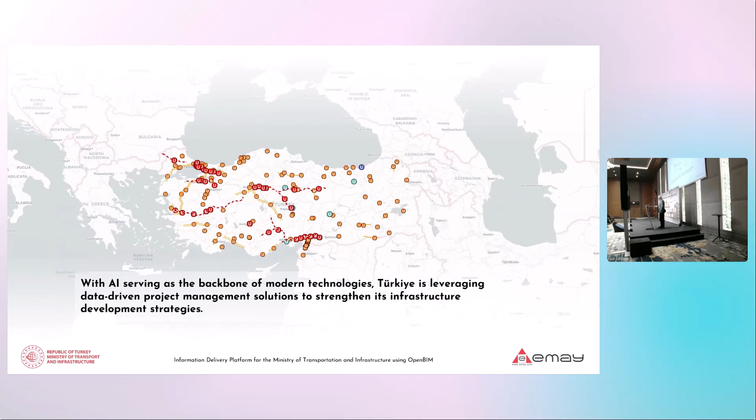As you know, in the AEC sector, the most significant transformation today is driven by data-centric processes. Turkey aims to manage its investments more efficiently and transparently through solutions based on AI, BIM, and data management. At the core of digitalization lies data with openBIM. This data is usable not only in design and construction, but also in operation and maintenance. This leads to greater transparency, efficiency, and sustainability.

Infrastructure projects also do not end with design and construction. They continue for decades through operation and maintenance. The critical point is transforming decisions into data and making them usable at every stage.

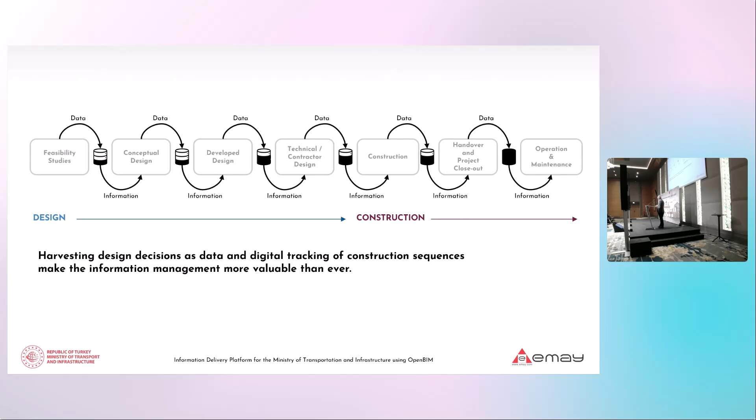I want to talk a little bit about Turkey's BIM journey, which can be summarized in 4 stages, 4 periods: 2013 to 16, initial ideas; then 16 to 19, metro project adoption; 2020 to 24, partially mandatory use in transport projects especially; and from today onward, openBIM integration.

Then in 2017, my company developed the first information management software for Istanbul Metropolitan Municipality to use in a railway project. Also in 2022, a GIS-powered nationwide information delivery management software, which we call UYS in Turkish, for infrastructure projects was initiated by the Ministry of Transportation and Infrastructure. Starting 2025, the journey will advance into its fourth period, marked by ongoing integration of openBIM strategies into the UYS framework and beyond.

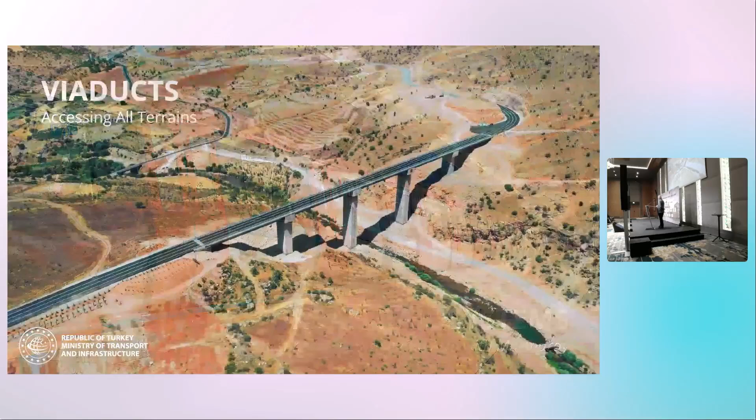This system spans 5 key sectors: roads, high-speed railways, bridges, airports, communication, urban rail systems, viaducts, and ports. And there are big projects.

The main idea is effectively 5 sectors managing more than 25 governmental institutions, and 70 consultant companies, more than 2,600 contracts, and let's say 2,000 investment projects under a single system. This is the main idea, and this forms a comprehensive user ecosystem that coordinates information flow at all levels.

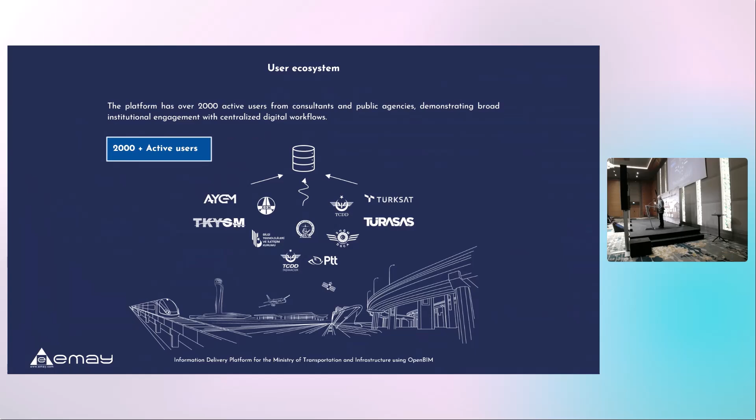I mentioned 25 institutions, so in the ministry, over 2,000 active users, including ministries, municipalities, engineering companies, and construction companies. UYS consists of modules by function: project management, investment management, strategic planning, data management, and user management.

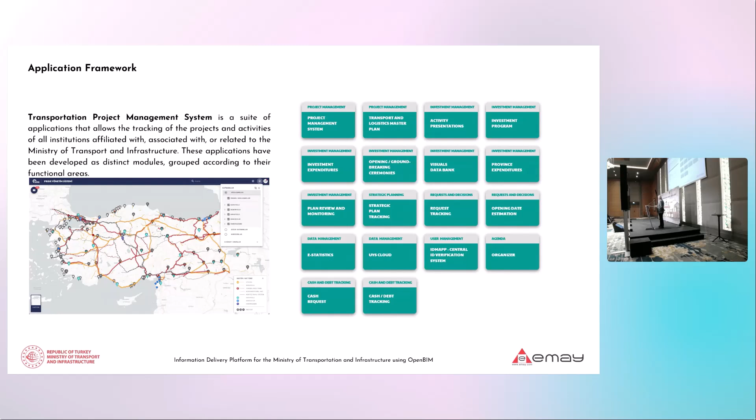A crucial component of the platform is its GIS integration. UYS is built upon a robust GIS infrastructure with geometric data stored in PostgreSQL databases. The PostGIS extension is essential for processing and exporting this data. Published data is imported to the GIS server using SQL codes, where the visualization process takes place before being published to the front end of UYS.

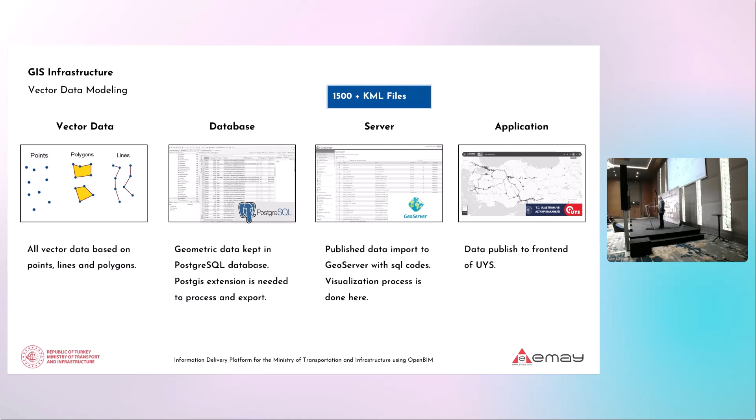All vector data is based on points, lines, and polygons, and the system contains over 1,500 KML files. This data is visually displayed on the UYS map screen. Our featured GIS interface allows for filtering all projects by province and vision projects from the national transport and logistics master plan by sector.

The most important part is also the legislative framework. Effective BIM implementation necessitates a robust legislative framework. The BIM technical specification ensures the integration of digital design and construction activities, setting standards for digital deliveries, transport management, and responsibility matrix. This BIM technical specification is published by the Ministry for institutions to use in all tenders.

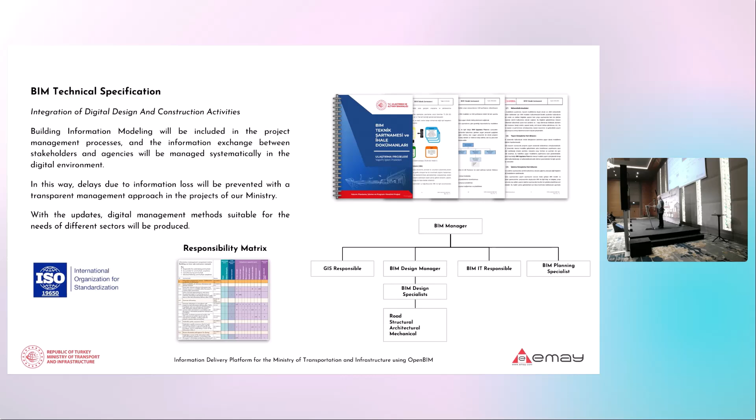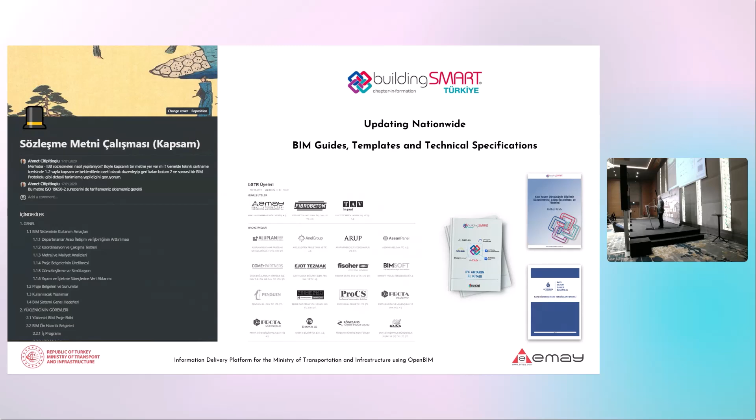The other legislative framework item, the construction program specification, mandates the generation of reports for key performance indicators, including product pace, cost, extension, and overrun. This helps identify bottlenecks in both cash and physical progress. It's also a mandate from the ministry, and continuously updated guides and templates ensure a common digital language.

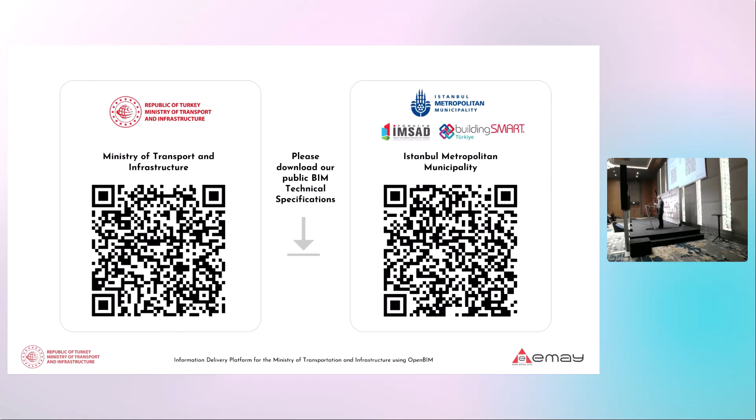Both specifications can be downloaded. The Ministry and Istanbul Metropolitan Municipality public BIM technical specifications are available for download by all, though I think those are in Turkish.

Another goal is our BIM model viewer interface, which introduces a new user interface within the project management module that we have to view IFC models and validation reports. This forms a key objective for this year in our journey to integrate openBIM strategies into the UYS framework nationwide.

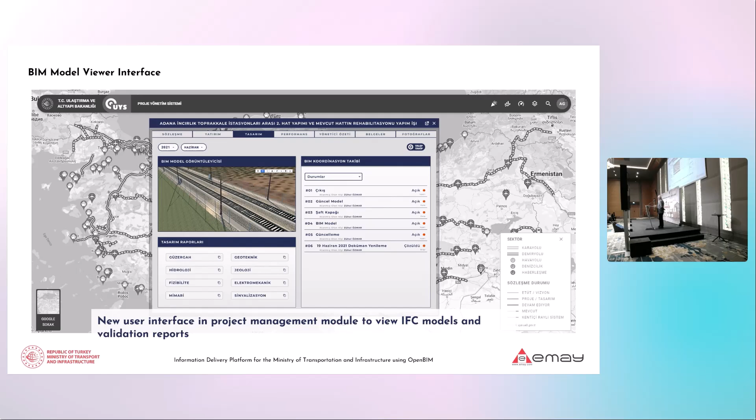Let me summarize all the presentation in two slides. Our achievement with UYS we can summarize in four items.

As you know, our achievement with UYS has been quite significant, with supervision over more than 3,000 contracts and more than 2,000 active users. We have made some steps in big data management, enabling real-time budget and progress tracking through transparent and efficient information use. We have built a geospatial data stock with over 1,500 KML files. This is the root of the whole project, and it has resulted in optimization and increased productivity.

Approximately 0.1% saving, roughly 10 million euros on an investment budget, when we think about the whole budget of 10 billion euros. This demonstrates our significant impact on financial oversight and resource optimization.

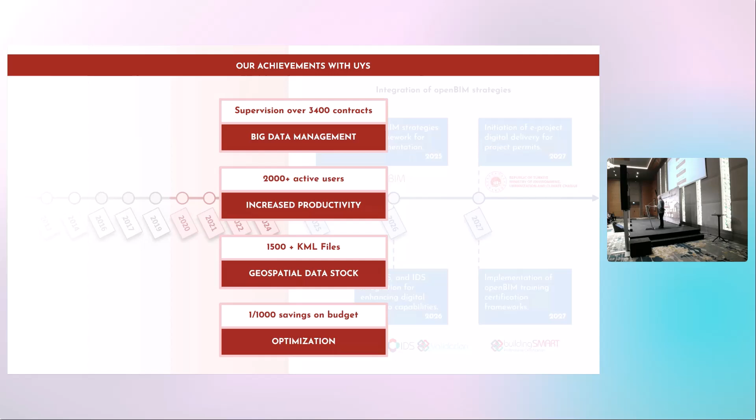Our future goals for openBIM integration: to follow international standards, aiming to comply with ISO 19650, and to create a foundation for a digital twin by automatically checking models and combining BIM and GIS. This will let us see 3D models in the GIS map. And to build a large collection of BIM data by delivering IFC models and creating IDS schemas, which will help us complete better both national and international data-driven projects.

And to improve our technical standards - it's not easy - under the guidance of buildingSMART Turkey, we are updating our BIM technical specifications to match the latest openBIM standards. We are also designing IDS schemas using the buildingSMART Data Dictionary. This is the most important part: improving the quality of our digital assets and making sure organizations can meet these new standards.

In conclusion, the UYS platform represents a pivotal moment in Turkey's approach to managing large-scale infrastructure projects. Our future objectives with openBIM integration are to align with international standards, enhance digital asset quality, and build a widespread information management culture across the sector. Thank you for your attention.

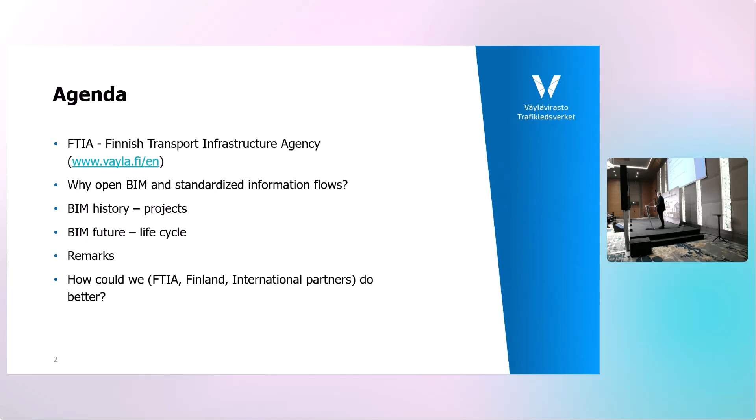First of all, a little bit about our agency. We are a state organization responsible for roads, railways and maritime routes in Finland. Finland is a country in Northern Europe, and we are a very client-oriented organization. We are only 480 people working, but in our projects and processes we are buying about 18,000 people working. So we are buying technically everything, we are just a client organization.

This is our organization, a very typical public organization. We have different divisions in information management, you could also say silos, and we are working on how the life cycle information could go through the silos. We have a planning department, which does conceptual planning of the road and rail network development. Then our project division's only purpose is to make projects as efficient, fast and cost-efficient as possible. And then there is an infrastructure management department, responsible for the routes and networks. For example, the road network is 78,000 kilometers compared to a big project which is maybe 5 to 10 kilometers. The information needs are quite different.

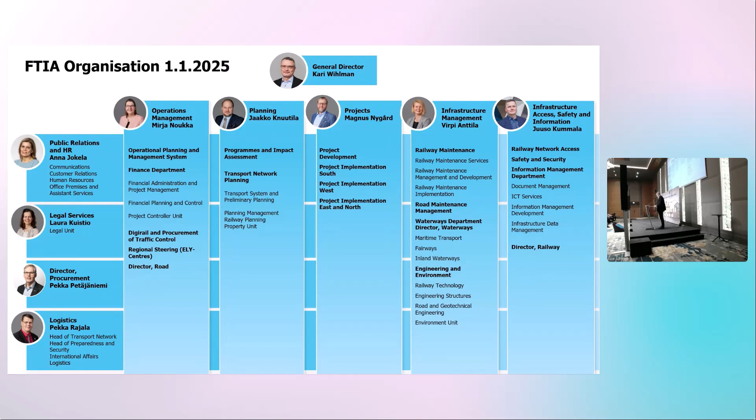But our goal is the digital twin. In the last session, Leo Svoboda was talking about digital twin - what is a digital twin, what's a digital model? We have defined in the FTIA that digital twin consists of the digital model, which is all infrastructure, technical infrastructure. And on top of that there is lots of information - traffic information, safety information, weather information - and that all is digital twin. So we don't talk about one bridge project.

Our organizational goal is that the digital twin and real-time asset information management is better by 2030 than it is now. So in the project information view, our project information coming from design to construction is linked to the asset information management system someday with the push of a button. Not yet - we also need real, reliable information from design to construction and so on. And this needs changes in our processes. We have traditionally had very siloed processes across all those departments.

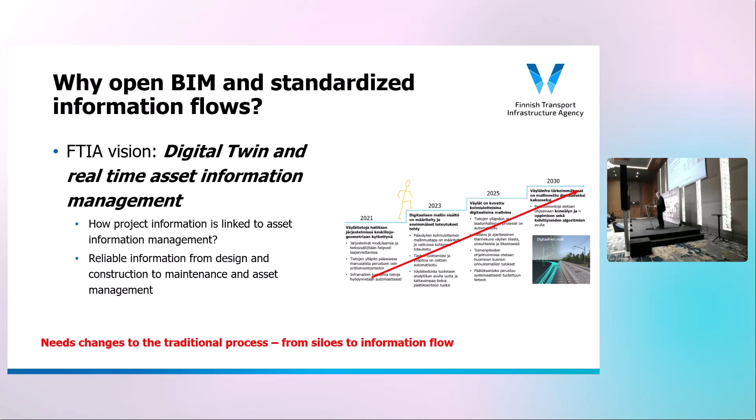Okay, very shortly, BIM development in Finland. I think in every country the building sector has started BIM development. It was already in 2012 that general BIM requirements came from the building sector, and infrastructure followed. Between 2010 and 2014 there was a big infrastructure BIM open development project where the general infra BIM requirements for our country were generated. We follow them in FTIA.

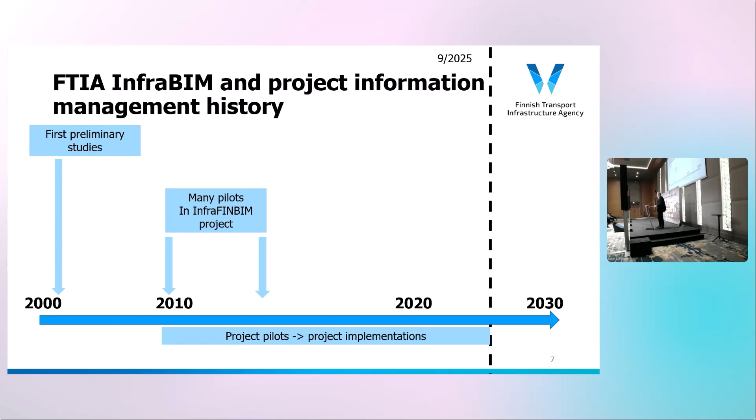We have made additions with our own things. So actually our infra BIM history in FTIA is already 25 years, so it's a long time - it's not changing in one night. We started first preliminary studies already in 2000, with the big national development project in 2010-2014. Since that project, we started to pilot BIM, and pilots have continued as a normal way of working in our project world. The first BIM guideline was the Bridge BIM guideline in 2014, the Road and Railway BIM guideline in 2017, and we have also been involved in bSI standardization work since around 2015. Tina maybe remembers better than me, since he was working at that time.

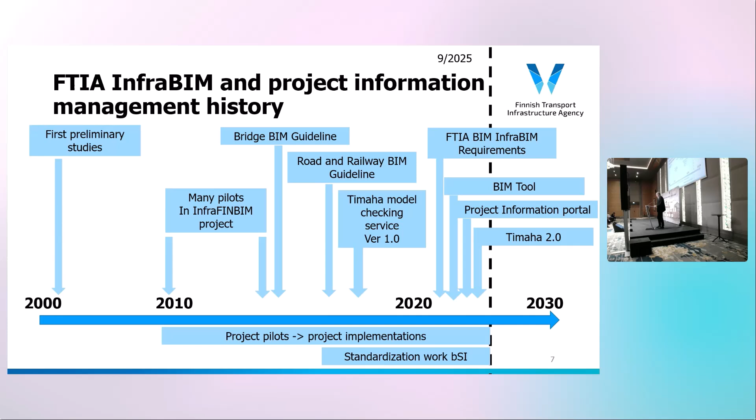The Timaha model checking service was helping our project managers handle BIM information requirements. We piloted that earlier, and after that we actually updated our FTIA BIM requirements in 2022. We have a tender BIM tool for our organization's use, and a tender project information portal for our organization's information use. And the last one is the new version of the Timaha information data qualifying service. This is very shortly our history.

And now we are working with our infra BIM requirements. There's a book or guideline for the roads and railways, and a book or guideline for the bridges, and they are over there - unfortunately, they are only in Finnish.

But why do our projects use BIM? I think our project managers have already learned and rehearsed using BIM in projects for quite many years. For example, this project in the picture is Highway number 6, the Koria renovation project, a new renovation. And I think the main reason is cost savings - when you are optimizing design in every phase of the project, when your production control is BIM-based, it just saves money.

We have a very good example in the Kirri-Tikkakoski project. The project team counted that when the bridge design, bridge qualification, bridge production, and the whole project was purely BIM-based, with no PDF documents and no paper designed, there were 28 weeks of working time saved only because we didn't print anything. And I think this is a very small example, but if you put all those projects together - in the same project they also counted that it was a 130 million euro project, and they actually built 6 million more infrastructure because of using BIM in their production.

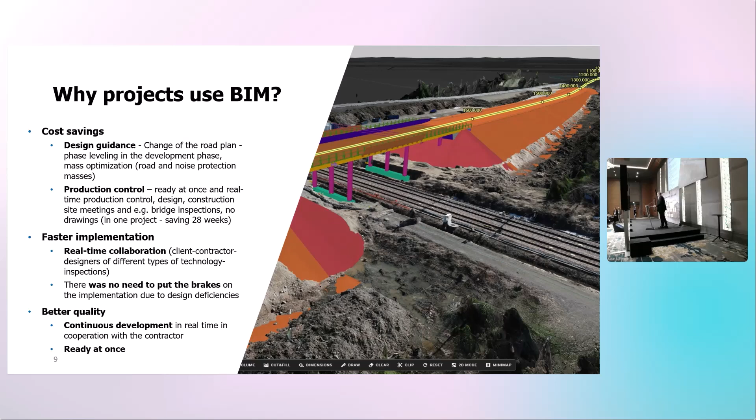So we really can be more effective with openBIM. We also achieve faster implementation when the contractor, client, and all designers work with the same models, defining the same models. We don't have a lack of time, and we also get better quality when we optimize everything digitally, and then we just construct it digitally. So BIM is really worth investing in.

And we have lots of projects. Actually, our government decided last year to put more infrastructure projects on than it has been for a long time. Our building sector is a little bit down, and when the economy is down, the private building sector is down, so the government always invests in infrastructure, at least in Finland. And now we have more projects than ever going on, and this is the map of the projects going on right now.

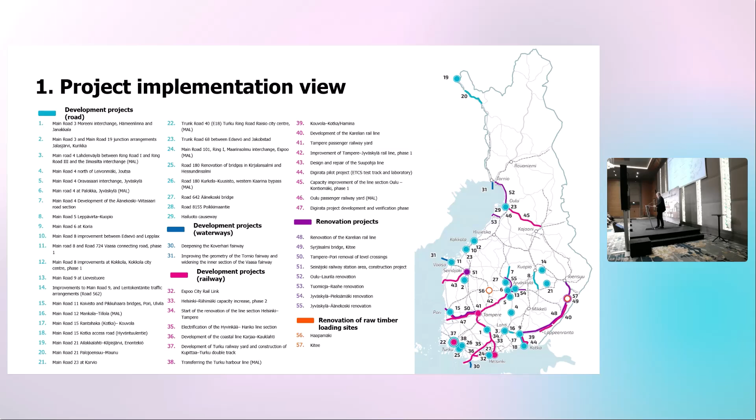We have evaluated our BIM maturity in our projects. We have done it a few times, and we use the common Nordic BIM maturity model, which we developed with our 7 Nordic friend rail and road organizations from Nordic countries. We have used this maturity model interviewing the projects: how do you really use BIM in your projects? And this is the results.

The first pilot was in 2020, and then we have done it 3 times after that. We haven't done it this year or last year, but maybe next year we will do it. And you see the level is quite there, 2.2, 2.3. It's very, how do you say it, very slow movement up.

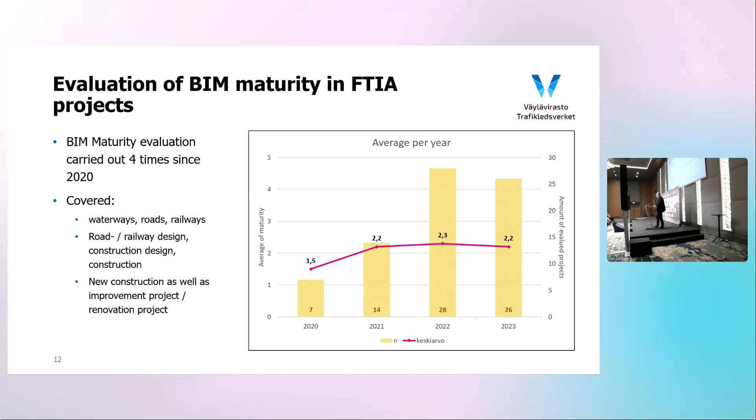Actually, I think the average of Finnish Transport Infrastructure Agency is not important. It's important to understand why different projects are at different levels. If you look at the projects that are not so BIM oriented, they are usually small projects with small budgets, renovation projects. If you look at the high ones, they are big projects, mostly railway projects, some highway projects, and then we are in the middle with lots of normal BIM working projects.

More important than the average, like I said, is to understand how we can get those low performing projects to the next level, or actually, since we are very client oriented, what the project manager can do when he starts the next project so he can step a little bit further in the matrix.

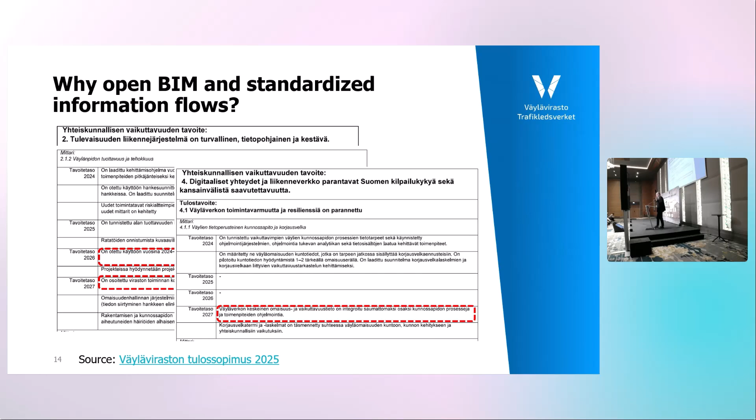Why openBIM and standardized information flows? This is from our transport ministry, unfortunately in Finnish, but they have set us targets at 2027, which is actually not so far away, only a few years. The information flow from design to construction has to go all the way to the asset information systems.

There is a lot to do, to be honest. We are working for that. I don't believe by 2027 we will be totally there, but we are on a very good way.

Asset register requirements: we have 5 different asset information registers. That information has to be given, and those requirements have to be given in a machine readable way to our design process, better than it is nowadays.

And also, one target they have set for us is that we have to increase productivity in the market. In that productivity leap, or getting better projects, one important thing is better information management through the life cycle, and not losing information at every step of the life cycle.

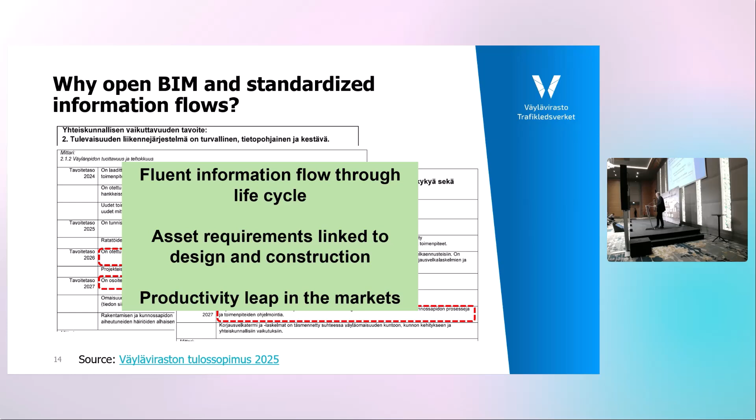And we have noticed these issues to solve. Lots of information is generated throughout project development, and then only some of it is used in the asset information. Very much information is delivered in the design, and then it's a little bit regenerated in the construction phase, and then it's again regenerated in the asset information phase.

We had a productivity workshop last week for our stakeholders, the companies working for us, and we asked them what is the biggest threat to our productivity. One thing that came up was that you have too many IT systems and you put the same information in too many different places. Yes, we know it, and we have to work on that.

Like I said earlier in the organizational chart, asset information systems have a totally different logic than the project management systems. The asset information system for roads has to cover 78,000 kilometers of road network. That's totally different information than when we make a small highway project and collect design and construction information. And like I said, we have 5 different asset information systems.

So in the future, we have to give those requirements to projects and they have to develop automatically. Current silos, we call them divisions, cause inefficiency, but we have to live with that one. And continuous information flow will also save resources.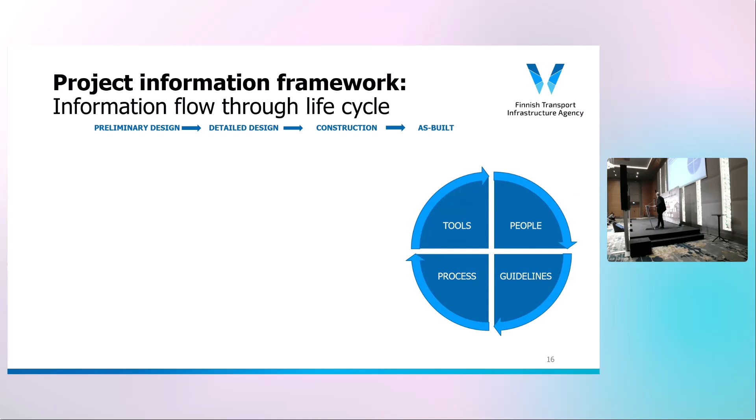We have started to solve this problem at the project information level. We have defined our project information system, and now we have all the pieces tendered already to our organization.

We have a project information portal where we have all the information for different projects in the same harmonized way. Earlier, every project had its own project information portal, and every project started by defining how to share information that time. Now we have one way to use it, and the project managers are very happy. They finally can start using it and don't have to invent the wheel every time.

We have a tendered BIM tool connected to the project information portal, and we have also tendered Timaha 2.0, which is a helping service for our project managers.

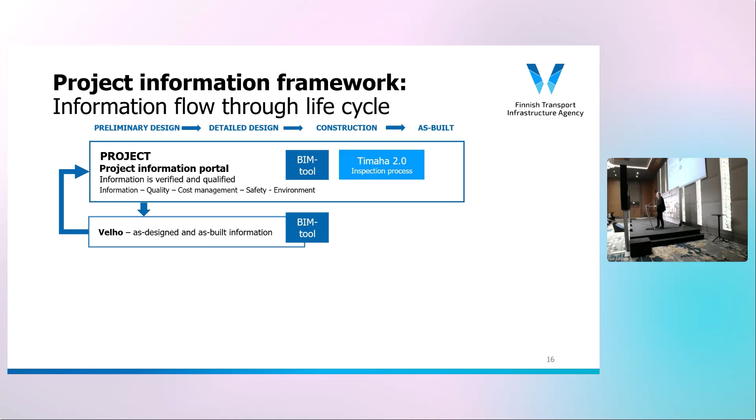Our goal is to keep that information flowing in future to our 5 different asset information systems. In that process, we have to get the best tools, develop processes, update guidelines, and train people.

I think once this picture was defined and we noticed that project information has to flow to the asset information system, it increased BIM interest in our organization. Earlier, BIM was very much a project thing, but now, for example, BSDD and IDS have also woken up the information department and the asset management department. So I hope we are collaborating with fewer silos in the near future. We are working for that one.

The heart of our project information system is our project information portal, BEM, from Buildercom, the Finnish company.

There was in the previous presentation something about security systems and safety, and this is a very important issue. We are living in a politically very hostile world. We have some very friendly neighbors, some neighbors not so friendly, and this kind of project information data is very highly sensitive. So you will ask, where is the data? I will say it's on Finnish soil, in the SaaS server, a security-based SaaS server.

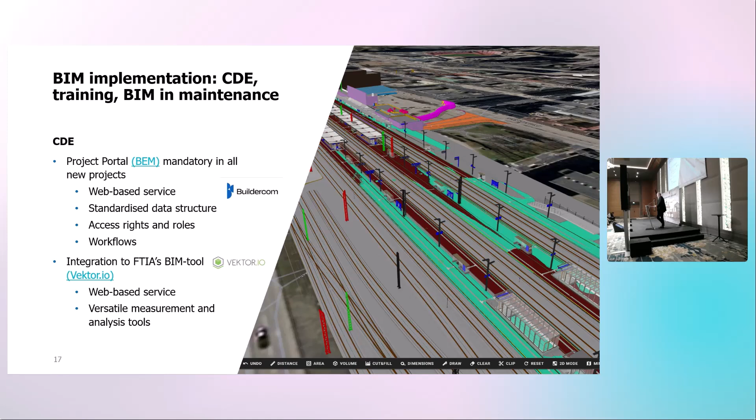Vektor.io has been tendered as the BIM tool of our organization, and that picture is from the Tampere railway project from the Vektor.io tool, where we put all information into the project information portal - documents, cloud points, BIM models, everything - and then the BIM tool is connected to that project information portal.

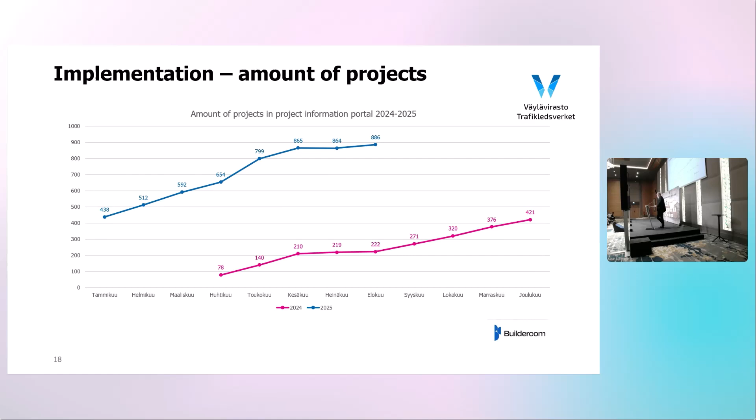We started using the project information portal last April - huhtikuu in Finnish - and the project managers love it. There are already 900 projects established, and 15,000 logins per month. So it's really gained good acceptance in our organization.

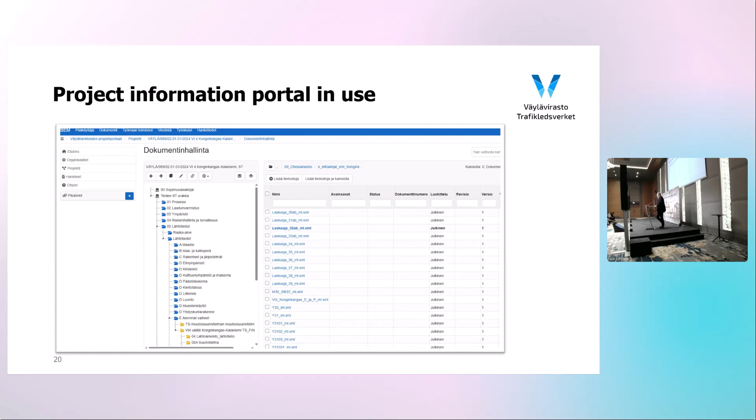It looks like a very boring program, but it's helping our project managers. And of course the BIM tool Vektor.io is piloted and connected to that one.

Yesterday I got a very funny call. Our division director had shown this slide to all of our personnel, and one project manager called me: Tarmo, I want this on my phone, I need it in my project. So it's a good moment in this slow development history.

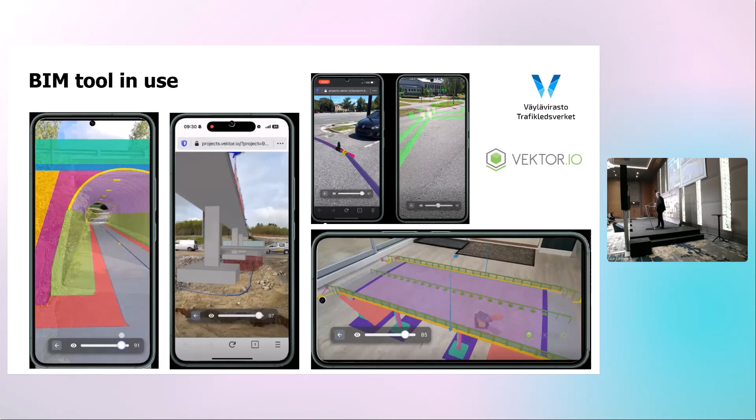How much time do I have? Still a little bit? Yeah.

So, BIM implementation - we have a CDE. Everybody always asks, how about BIM in maintenance? And I will say we have those 5 asset information registers, and their logic is totally different. Somehow they are information models of the network.

We want in future, like I said, design and construction information to flow automatically to the right places. Those systems probably don't use BIM similarly to how it's used in the project, but we need the information to flow. Last December we decided we have to do a little more work toward our ministry target.

We launched the InfraBIM standardization project, led by my colleague Marion Senkwan, who unfortunately is not here today, but there is a roadmap.

We started at the beginning of this year with our new projects, because we defined that now we have a record high amount of new projects. If we want to change the industry, we have to push for these new projects to take up BIM implementation.

After that we can continue with training, standardization of processes, and information flow. You can see there is BSDD, IFC 4.3, ISO 19650 - we are working toward that. But like I said earlier, by 2027, all information from design to construction to maintenance - it's a bit of a dream, but we are working towards that one.

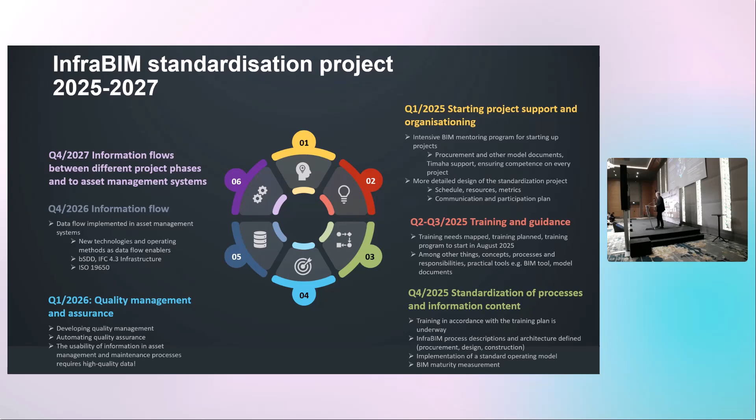And we have started the IFC implementation workshop. It's led by Juha Hyvärinen, the buildingSMART fellow. Juha is a very good person, he knows maybe the best of IFC in the world. He's making the workshop for us.

And this InfraBIM standardization project is going through. Actually, this morning at 7:30 we had a steering group meeting, and still the thumbs were up. Okay, so a little bit worse.

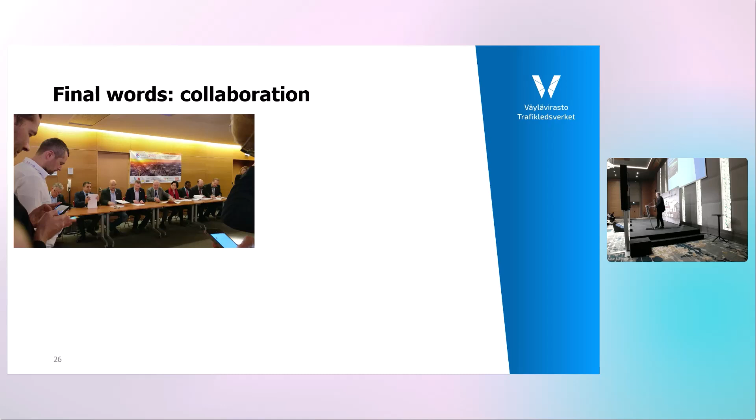We, as FTIA, have been in infrastructure standardization projects in buildingSMART International for a long time. We have had a wonderful international collaboration. There are some nice pictures, you can maybe recognize some people. Tina is there, and many other people. We have developed a common standard.

Now my question is, can we do more collaboration also to implement the standardization? We can share good experiences with each other. We have lots of collaboration with our Nordic friends, Karin and other Nordic administrations, but we could do maybe more. We have noticed in Nordic road and rail administrations that everybody has a little bit different view to BIM, but the problems are the same. And if I look at my USA friends and Turkish friends, I think everybody has the same problems, a little bit different situation, so we can work even more together.

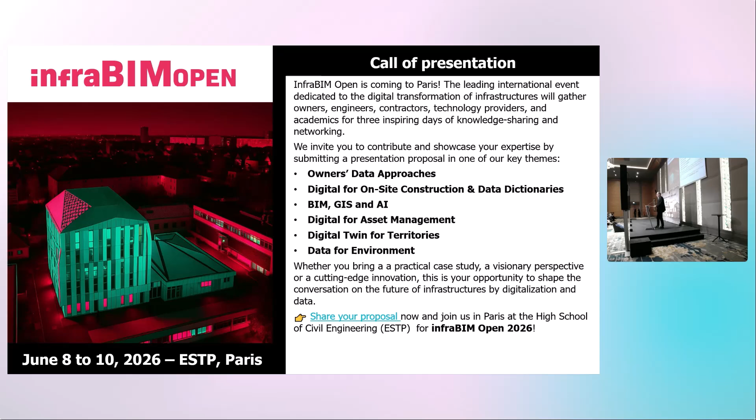And my last slide is: we can start collaboration in Paris next June when InfraBIM Open, the very good seminar made in collaboration with buildingSMART France and buildingSMART Finland, takes place. It has been in Tampere and Lyon earlier, already 7 times. This time, next June, it's in Paris, so it's even easier to reach than Lyon or Tampere. So welcome to that event, and thank you very much. If you have any questions, you are free to contact me or Marion, and we will tell you more about FTIA BIM. Thank you.

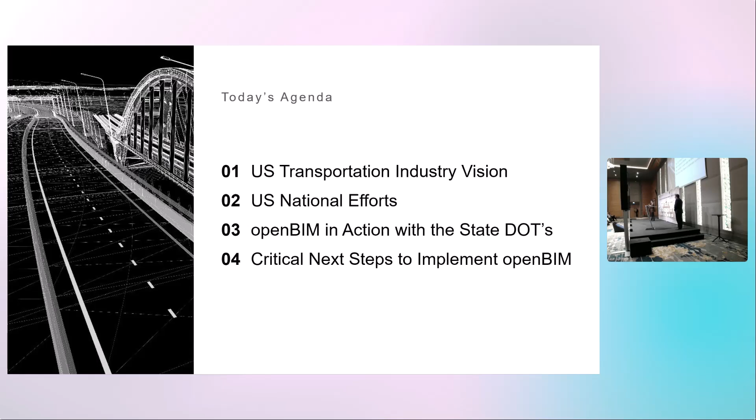Well, thanks. I'm the second Will, Sharp. I work with HDR. We're an AEC company, a global company based in the U.S. with about 14,000 employees. My background is as a transportation engineer - I've been doing this with HDR for 38 years. The last 7 years I've been working very closely with AASHTO on developing national open data standards, particularly on the bridge side, and many others. And I should add, I'm an IT data nerd - I am not a civil engineer. So we're going to talk about the vision for the transportation industry in the United States, what we're doing at a national level, also what the states are doing, some success stories, and then where we go from here.

First off, FHWA published the roadmap for where we go, and we're committed to it. You can boil it all down to: data needs to be accessible at the point of need for every customer, every consumer. And in order to achieve that safe, efficient transportation system, the right data has to be there, and that's something you were talking about, Tarmo.

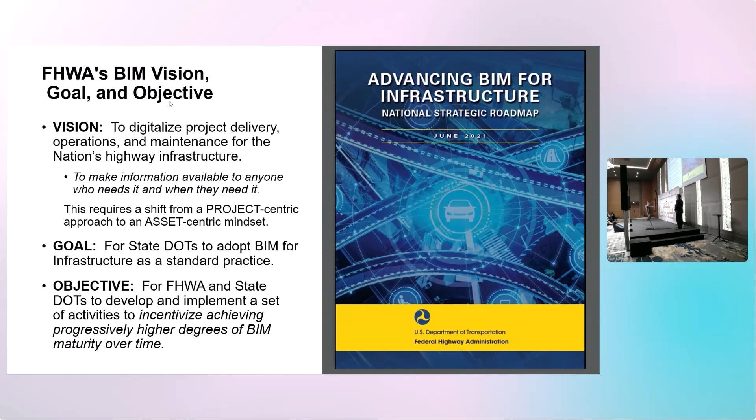So in order to achieve that, we also have to encourage, empower, nudge the different DOTs and all the members that make up that, as well as the contracting firms and everyone else that supports the transportation network, to manage and sustain a safe and efficient transportation system through project development and maintenance of that network, using digital workflows.

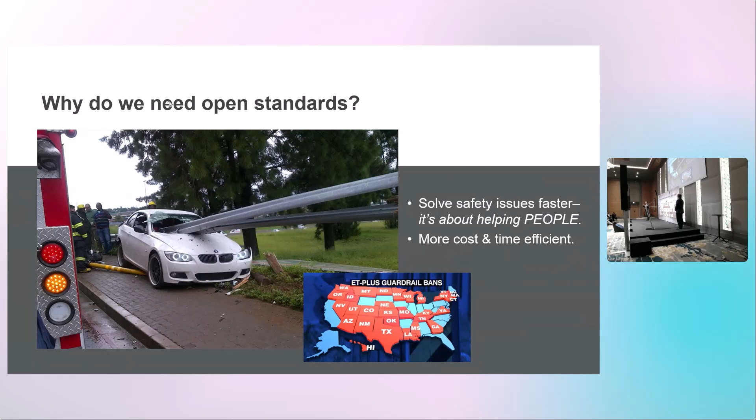So why do we need to do this? These kinds of tragedies happen every day on our roads, and I'm sure they happen all over the world too. It's really not about asphalt and concrete, it's about human beings. Every day that a project is delayed, that's another opportunity for a tragedy. In our DOT, we talk about safety over and over, and the urgency is to get people home safe at night. Simultaneously, there's an economic factor too.

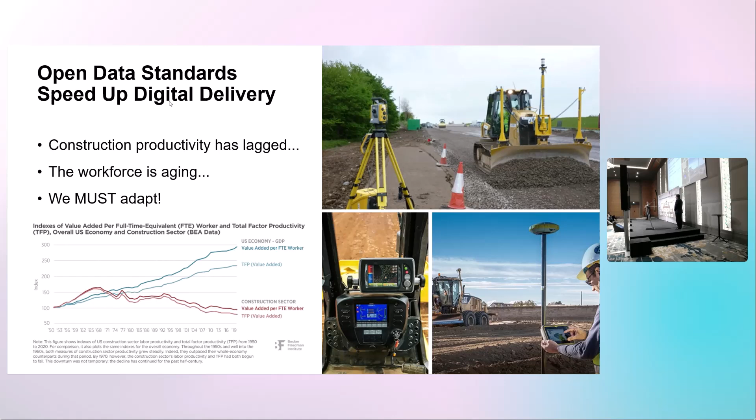So we're losing people. We've got to do things differently. We've brought in some technology, but there is still a huge gap in what we should be doing. And that's where openBIM is our opportunity.

So we know, just like you were talking about, Tarmo, this is an information ecosystem that flows throughout the life cycle of all those assets. And so it's not about doing one project efficiently, it's always doing things efficiently.

Henry Ford was quoted to say, if you could save 10 steps with 12,000 workers, you would save 50 miles of inefficiency in your system, in your project. The same thing happens with all of our projects. We have to convert it to this, and then we have to do that, and every time we have inefficiency, that causes cost, that causes time delays, and that leads back to tragedies. So we recognize the ecosystem, we're driving towards streamlining that, and that's where IFC and openBIM really creates an opportunity.

This is an example from the Iowa DOT of the different software that they use in their life cycle. And again, it's not one piece of software, it's a huge smorgasbord, and each of you have these same things. You were talking about 30 different big systems, Karen. So we're looking at the same kind of challenge, right?

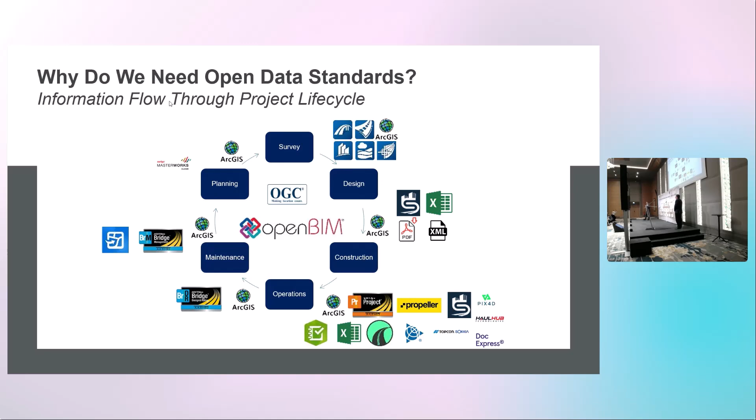All right, well, I was going to walk you a little bit through the state DOT efforts as they shift to digital delivery. One of the groups I've been happy to work with the last 7 or 8 years is an AASHTO committee called the Joint Technical Committee on Electronic Engineering Standards. This is the national committee that had the IFC resolution for AASHTO, and it's really driving a lot of the innovation at the national level.

And one of the things they discussed is how does a DOT move to full digital delivery? So they actually identified 5 levels. A lot of the states right now are at level 1 or level 2. What this is, they're using 3D software for plan production. They're starting to provide digital information to the contractors, but typically it's for information only, basically use at your own risk. And that digital information can be surfaces, alignments, Excel files, things like that. It varies greatly, state to state and project to project, sometimes CAD files as well.

One of the areas we're looking at, though, is what we call model as the legal deliverable. And what this is, the contractual deliverables, the digital deliverables become contractual, so they take precedence over the plans. In some cases, like level 4, they replace the plans. We call that planless digital delivery.

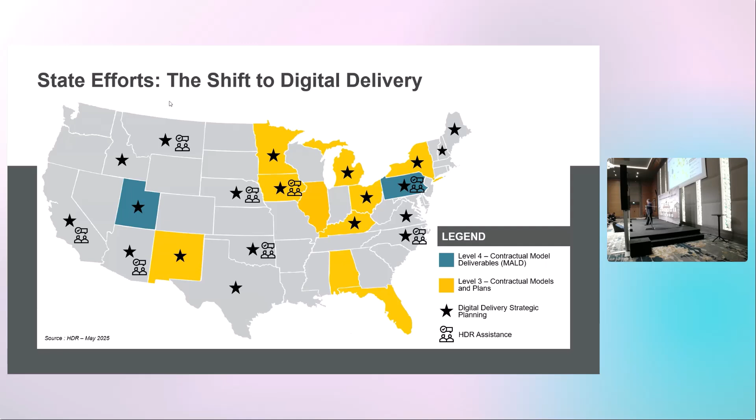So with that, I'll turn it over to Will for national efforts.

Okay, so even though we started doing research in the mid-2000s about moving to BIM, it really wasn't until 2017, when the pooled fund study for BIM for bridges and structures got kicked off, that we really started to get traction and momentum. In 2019, AASHTO, which again is all the DOTs, collectively said we will use IFCs. Well, they adopted it to encourage it. It wasn't an overnight switch.

And then JSTAN was formed, the joint subcommittee. And then in 2022, AASHTO joined BSI. So again, we're taking these steps forward. And now in 2025, FHWA has created a working group - I'm forgetting the technical name for it, sorry Catherine - but we're putting together a kind of leadership working group to try to wrestle this down at a national level with key decision makers.

And we're also hosting an openBIM summit during BIM week, where again multiple pooled funds come together, and JSTAN and others, and we're bringing in the software industry as well as other partners to try to talk about how we get the United States to where we need to be.

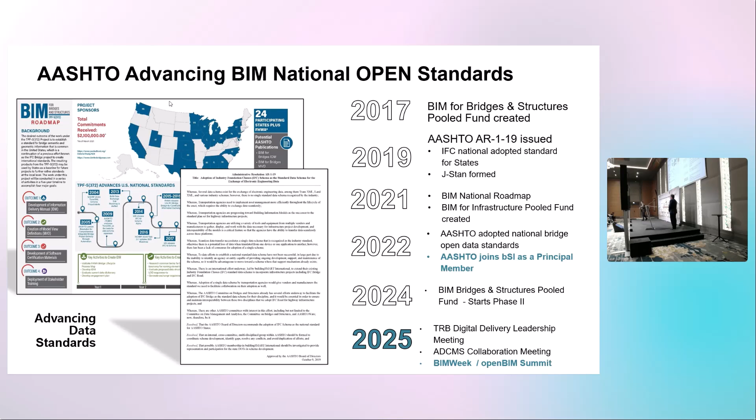So I've said JSTAN several times. Again, we're a joint subcommittee made up of DOT representatives from different states who have expertise in specific areas - construction, design, asset management, et cetera. We come together to coordinate and facilitate this movement towards BIM.

And then the subcommittee is actively engaging the various aspects of AASHTO because, again, AASHTO is a huge organization with a lot of moving parts. And we're also simultaneously engaging different industry interest groups, as well as the software industry, as well as buildingSMART.

Will and Tricia, my chair of JSTAN, are co-chairs of the Roads and Highways, or Bridges and Roads committee within the US chapter. I sit on the Infrastructure Domain Steering Committee with Karin, and we are working there. I'm also on the SCTE, or I'm the representative for SCTE. So again, AASHTO and the US community is trying to engage constructively and learn as much as we can, and simultaneously bring what we learn, or what works for us, and share that with y'all.

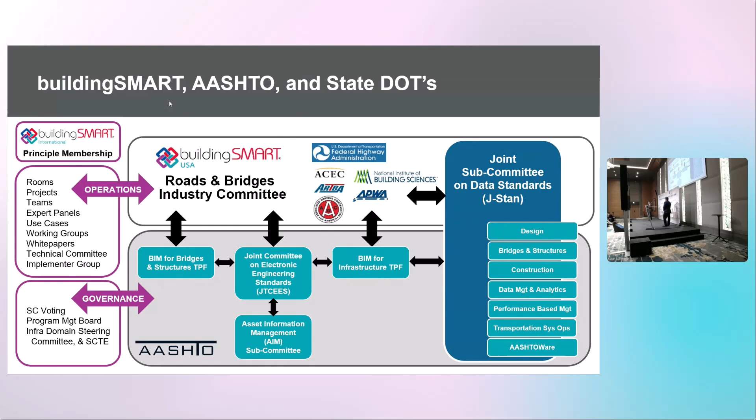So we've mentioned pooled funds. You know what pooled funds are - transportation pooled funds in the U.S. is where all the state DOTs can provide funding for projects of national significance that there's no way the states could do on their own. So we do have two pooled fund efforts that are focused on BIM and open data standards.

One of those is the BIM for Bridges and Structures project. One of those is the BIM for Infrastructure project. And this map shows all the states that are involved. So this is really a national effort within the U.S.

We have a lot of agreement with the states. The blue states are BIM for Infrastructure, the yellow are BIM for Bridges, and the green are both. So you can really see this is the majority of the states - we have great involvement with this. Federal Highway Administration has also provided funding for these pooled funds, but it would be very difficult to do this without this mechanism.

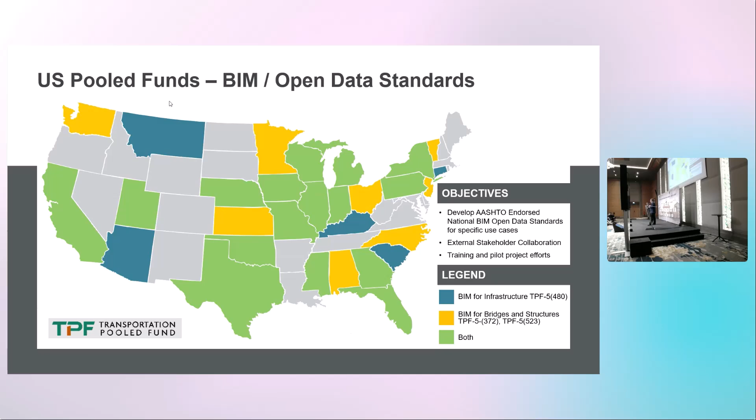So the pooled fund efforts - just to summarize - the BIM for Bridges and Structures started back in 2017, and our focus from day one has been openBIM. How do we develop these open data standards nationally? How do we implement those? I can tell you this is a very focused group - 24 state DOTs are involved. We started with that design-to-construction exchange, and now we're starting to focus more on the digital as-built model and the three exchanges that comprise that.

It's really about developing these national standards—IDMs, IDSs, BSDDs—and having this set up in a repeatable and reliable process for our bridge projects. There's also the BIM for Infrastructure project that started in 2021. There's a lot more synergy between these two pooled funds. There are two separate teams working on this, but a lot of common states are involved, and we have a lot of shared goals. This project is also focused on implementing openBIM workflows at the national level.

One of the things we did with the BIM for Bridges project is we actually worked with buildingSMART International to go through our work plan—how do we plan to develop and implement these national standards? We reached out to some international experts with buildingSMART, shared our plans, got input, and we really want to be in close alignment with the international efforts around openBIM.

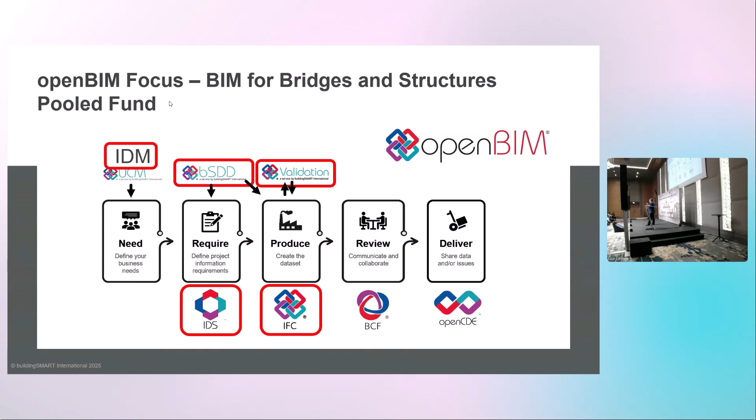Another key focus area of ours is our stakeholders. We've got to bring our stakeholders with us. In the U.S., we have three main national industry groups: ACEC, the engineering companies; AGC, the contractors; and ARTBA, which includes a combination of engineering companies, contractors, and owners.

We thought it was very important to approach all three organizations, explain where we want to go with openBIM and open data standards, and ask them where they're at on this—do you support this, do you not? I'm pleased to announce that all three organizations have put out either position papers or policy statements saying they believe in openBIM and support this.

AGC, I think theirs was well stated: AGC fully supports initiatives that standardize how digital information is created, transmitted, and permitted for use, including model as legal document and open data standards. Talking to the contractors, they want that repeatable, reliable exchange—they want it contractual so they can rely on that data. So we've gotten great synergy from the national industry organizations.

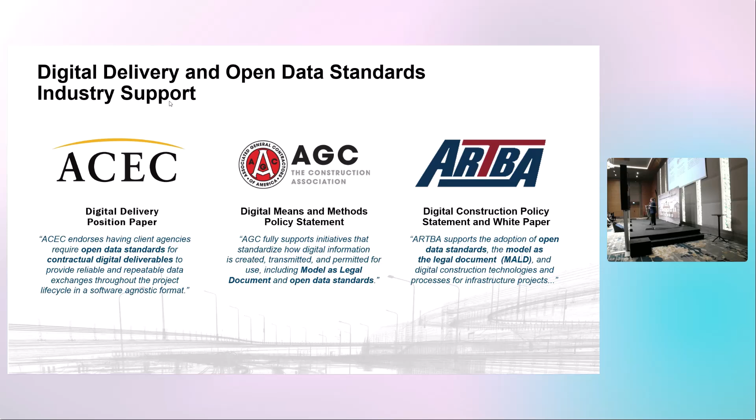We've also been working with our technology providers, and this is an important part as well—we don't want to develop a standard that cannot be implemented in the software we use. Many of you know Jeff Ouellette; Jeff chairs a group that works with our technology providers. This is open to anyone—if you're interested in getting involved, send me a note and I'd be glad to connect you with this group. We really want to work with the technology providers and make sure the standards we're developing are implementable, getting their input too.

Another key concern from the engineering companies is that we're asking them to sign and seal these digital models, but our quality management process is not set up for digital models—it's set up for 2D plan sheets. One project recently completed was a national research effort to develop an industry reference for doing quality assurance with 3D models. This was just published a few months ago and is available free of charge. If you're thinking about how to check the quality of these models, this is a great starting point for guidance.

So we're going to talk a little bit now about openBIM in action. It's great to develop the standards, but you've got to apply those standards—that's where the rubber meets the road, and that's where you really find out how well the standards are working or not.

In the last year, we've actually had three bridge projects leveraging these national standards that have been developed. By design, these are very simple bridges—we call these workhorse bridges. We've got one steel bridge, two pre-stressed concrete bridges, three different designers involved, and two different states involved.

The workflow we're really working toward in the US—our vision—is that the engineer will be able to use the software of their choice to create the models. These are just some of the tools we're using and looking at in the US, but right now this is not the case. With most state DOTs, the technology used for design is dictated by the asset owner, and that really impacts innovation.

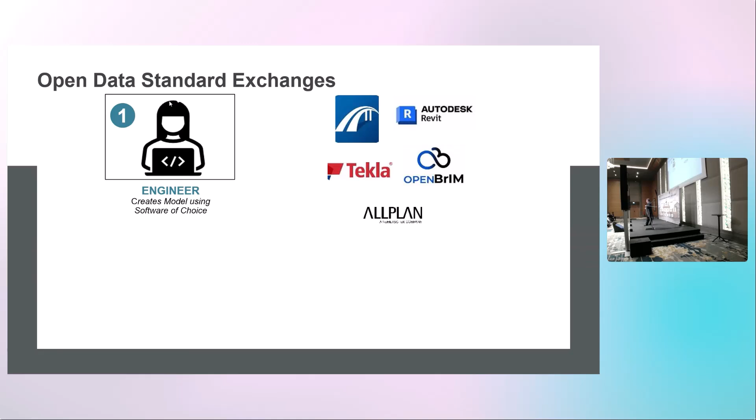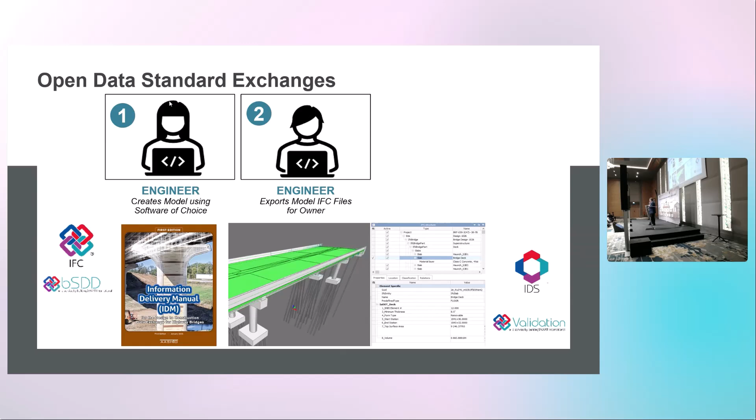We also envision these national standards as critically important—you have to have consistent deliverables. So we're investing a lot in national standards like IDMs, IDSs, and bSDDs, but we really want these standards formatted in a very similar way. That's very important for interoperability and really openBIM. So that's a key focus area for the engineers: being able to generate these IFC files that meet the requirements of the owners.

One of our goals is to actually advertise the project with IFC as a contractual deliverable that either replaces part of the plans or even maybe all the plans. So that's really what we're trying to do with the IFC files.

That's an area that we do feel like IFC, with the right requirements, provides the information needed to build these jobs, and also provides good information to use downstream with asset management as well. And of course, the contractor—I've been doing digital delivery with proprietary tools for a long time. It's a very different discussion with contractors where you come in and say, I have an IFC file, what technology would you like to use? And I can get my data to your technology.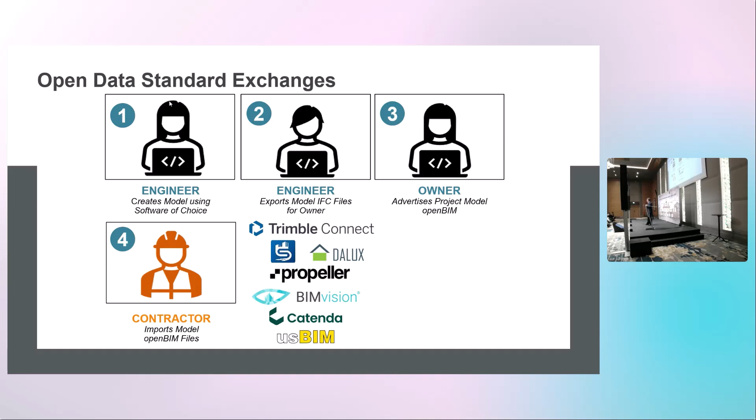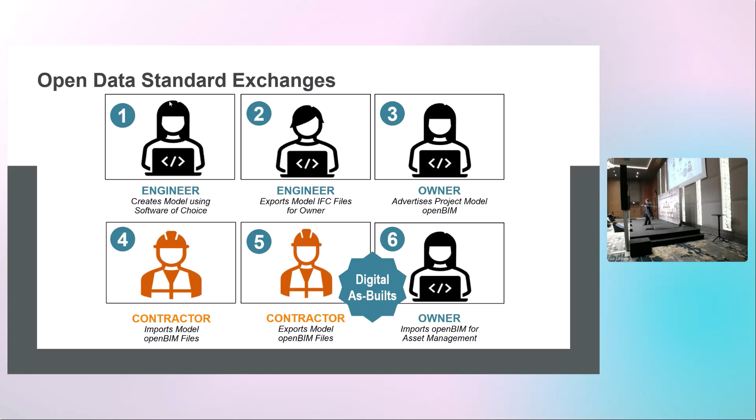So these are some of the tools that with the pilots we actually investigated to use on the construction side, and really reached out to the contractors and the DOT construction inspection staff about what they would like to use, what serves their needs. Because there's very different needs—design authoring versus construction, very different needs for different tools. And of course, eventually we will ask the contractor for a digital as-built to really complete that life cycle digital workflows.

And that's the whole idea with this—it's all about the data. It's not about the technology. It's about the data and having different ways to access that data.

This is a screenshot from the Iowa pilot, and it shows some of the detail in these models. These are very detailed models—construction level accuracy, full reinforcement modeling. The reinforcement, it's probably hard to see, but we have all the attributes of that reinforcing. You can pull out quantities, you can figure out how you need to construct these. But these are very, very detailed models.

This was actually in Trimble Connect. We designed this with Bentley ProStructures, but we were able through IFC to bring this in at high fidelity to Trimble Connect for the contractors' use.

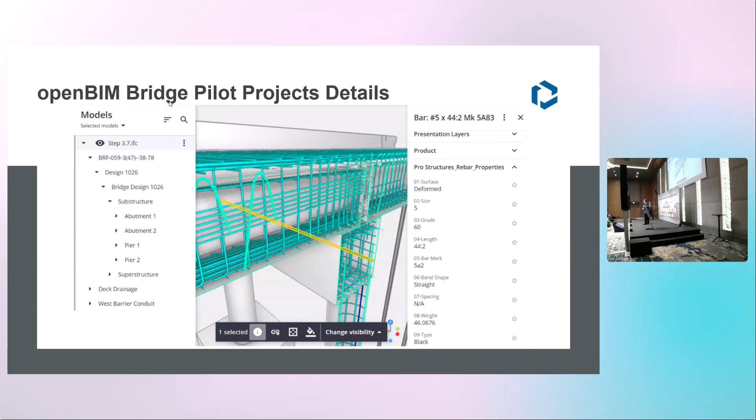This is another one of the screenshots, and I really like this one. With some of these construction softwares, we can set preset views for the contractors—they're used to seeing the design in certain ways. Instead of showing this on plan sheets, now they can quickly navigate the model, and all this information, all the dimensioning is driven directly from the model. The model changes, the dimensions change.

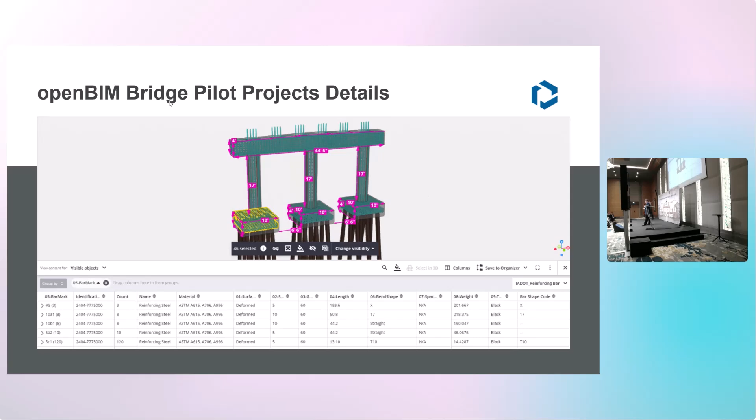They also can pull out quantities, like the rebar in the footing there—it's very easy to pull out all the rebar for that area, if that's what they're building next. So it just gives them a lot of flexibility to use the data. And this is another example just showing the cross-section of the bridge. Again, the contractor can cut sections anywhere they want, right? They can look at the model in a lot of different ways with very easy-to-use tools.

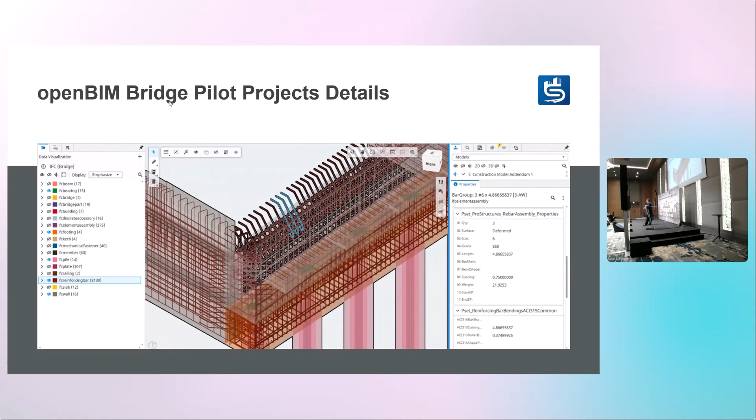And then this is the last one I had. This just shows some of the complexity with the reinforcing. With these bridge projects, it gets very complex—it's hard to visualize this. By having this in the model where you can zoom and pan and turn things on and off, it just provides the contractor a lot better understanding of the design, and really helps them understand what it's going to take to build that, which gives you better bids.

So a couple of key takeaways from these three pilots, and these are hot off the press. I think one has let, two are going to construction in the next month or so—these were just developed early this year. The first thing is it was critical to leverage those national standards. We had all three design teams working together to leverage those standards to develop the data in a similar way, using the IDS that we developed, the data dictionary, the IDM.

I really liked how the pilots worked out as well. Three different bridges, three different design firms, several design authoring tools used, and everyone did a little different workflow, and that's fine. As long as you get to the data at the end of the day, right, that's what matters. So each firm did use a little different workflow. We used different design authoring software.

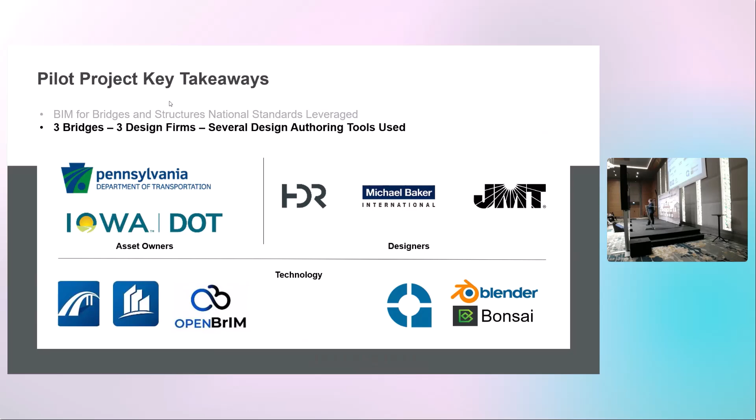We also used tools like Quadri and Blender Bonsai to do some cleanup of the IFC files to fully meet the requirements. But we're very much working with the technology providers to improve those IFC exports. Our goal is to have that be much more streamlined for future projects.

And then, like I mentioned before, consistency with the IFC deliverables is critically important. It just can't be IFC 4.3, check the box, it passes validation. They have to be structured in a very consistent way. They have to have the same spatial containment. They have to have the same IFC mapping.

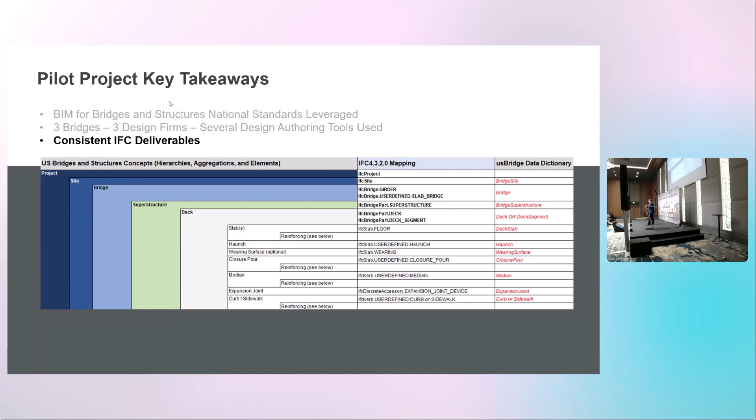So that was very important for the three different firms that were working on this. They developed this IFC in a very, very similar way, so it's very easy to find information in these files. They're all very consistently formatted.

Flexibility in construction technology - I touched on that earlier, but giving the contractors the ability to use the tools they want to use for construction. I think, and really having that highly detailed design information available for the contractors' use. And it's not only for construction, it's for bidding as well, to help automate their bidding process.

And the last one we had is that I can tell you these pilots have been critically important to inform the national standards. We're changing the standards based on these pilots. We learned a lot from the pilots. Our IDM, we're going to be able to streamline that. We've improved our IDS - we're actually tying very closely now the data dictionary, the IDM, and the IDS. So we've learned a lot. We've actually, in the process of updating the standards we've done, and I'm really encouraging more pilots to continue to improve those.

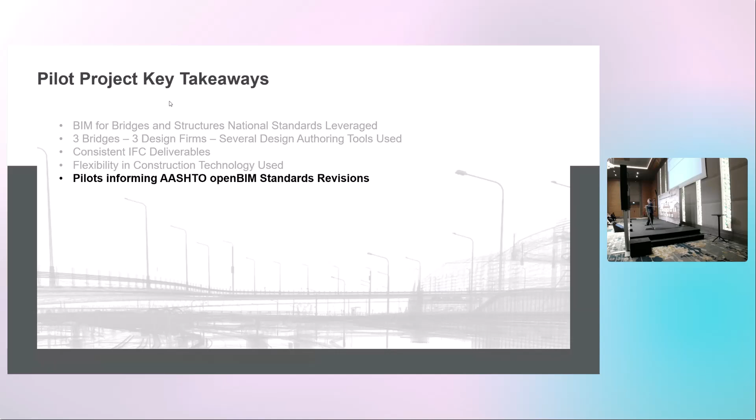And then one other project I did want to touch on is this is from Washington State DOT. And by the way, all these pilots, including this project, these were all funded by Federal Highway Administration. They have a grant program called the Advanced Digital Construction Management Systems, a very competitive program, but that really provided the funding for the DOT to really develop these pilots and test out these technologies. And it would have been difficult to do this without that funding.

But Washington State, what they looked at is their signing inventory. For a state DOT, lots of signs, always changing, and it's one of those - they looked at IFC to do this. So their goal on this project was to really take their sign inventory and manage those signs throughout the life cycle using IFC as their common data environment.

And this is one we learned a lot on this project as well. I wasn't personally involved, but from what I understand, there's definitely a need for more IFC training for the DOTs. And we also found some gaps in the IFC schema where we didn't quite have all the information we'd like to see on the signing side. But no, the DOTs are actually looking for other ways to use IFC as well. And there's definitely that life cycle, all the way through asset management approach. It's just, most of it's starting at design and construction, but there's definitely that approach with the DOTs as well.

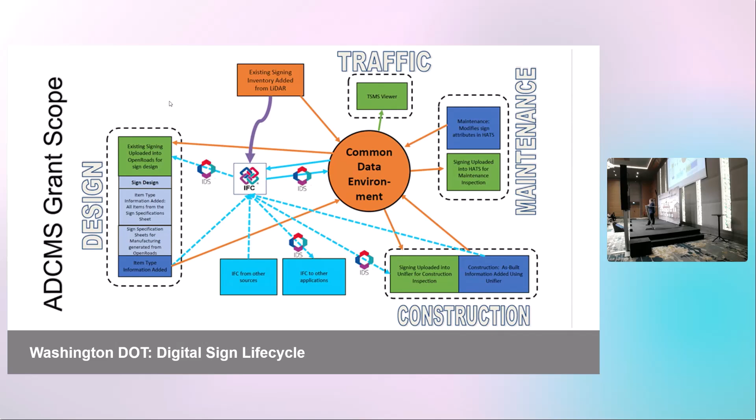So with that, I'll turn it over to Will to wrap us up.

Okay, so where do we go from here? So first, as Will was saying, we need to expand the use cases for our standards. We will continue to do more and more pilot projects and then provide that as a feedback loop. We're actively working to provide go-by or example IFC data sets so that we can more consistently educate, but also test the different softwares that we're using.

And then we recognize that stakeholder support is critical, both within the construction community, the DOTs themselves, as well as the technology providers. And so there is a consistent need for open dialogue from all these different places. Tarmo, you were talking about culture change and the challenge of that - we see that. It's very clear to us that within the DOTs, you've got some people that are, 2D plan sets - that's the way we've always done it. And we know we've got to grow them. So we know that stakeholder engagement is critical. Part of that means that we're developing role-based training to support this.

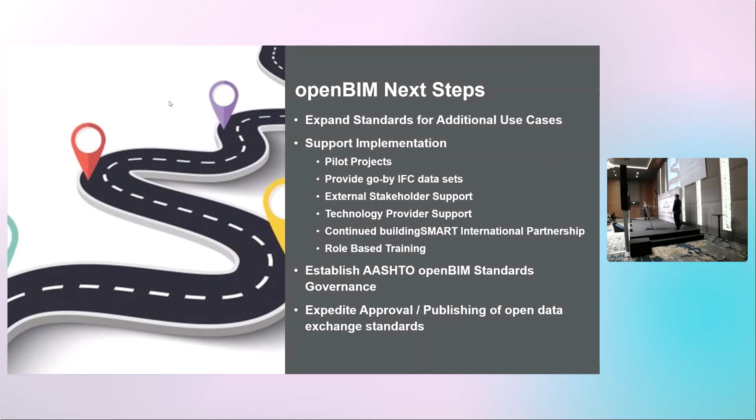J-Stan is continuing to try to grow and mature data governance to handle these open standards. Part of that challenge is the way standards are published. Within the United States, it's still very fixated on thinking about paper. We're trying to transform that because we're talking digital, we're talking technology, but yet all the rules push you back to how does it look in a printed book. So that's a challenge we're trying to wrestle down.

One thing we are taking on, which we talked about in the infrastructure room yesterday, the asset operations handover project should kick off in early '26. That's a partnership between, I believe it's Norway, Quebec, and Kentucky. And we're looking at a use case for buildings and a use case for transportation or roads infrastructure.

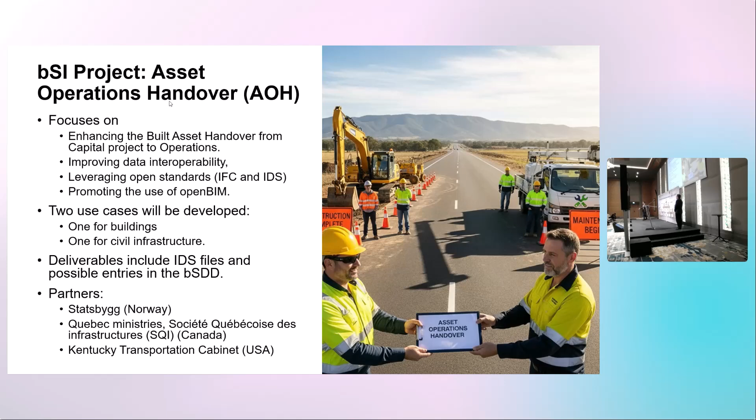We're trying to make sure that there's focus and energy on doing that transition, because the majority of the work in the United States has been on the design construction handoff, but we recognize that's not the end of it. We don't want a cliff where the information just dies and then right now it gets recreated.

Also, we're doing the Bridges Summit. That'll be in San Diego in early November. And that's an opportunity for all the stakeholders to come together, to share the good things that they are doing or have learned, and then also provide feedback into the system so that we can get the entire United States up and moving more efficiently.

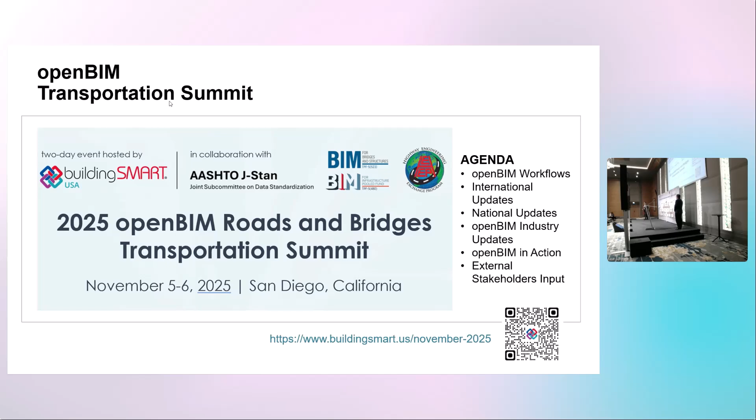Finally, I just want to make a plug. This is something that is baked into Kentucky. It's really not about asphalts and roads. I'm going to say it again, it's not about asphalts and roads. It's about people and keeping them safe and getting them where they need to be. Every person there is somehow attached to the transportation cabinet. And the reality is, all of us shape and influence the people that you serve. So keep it in mind.